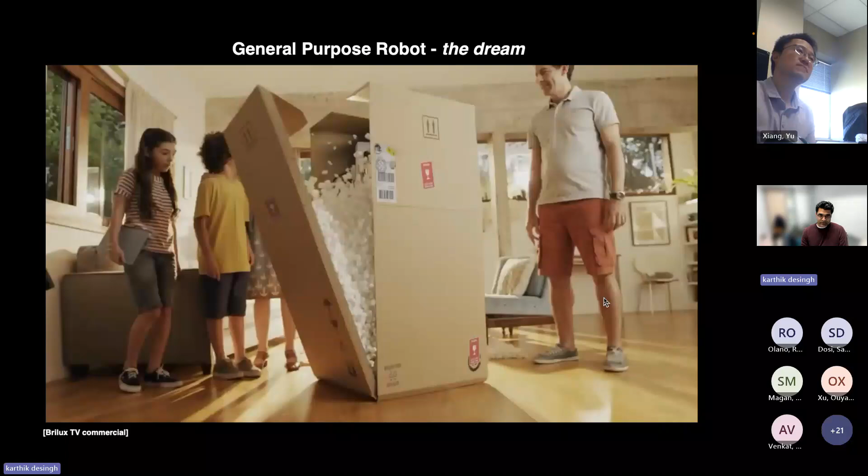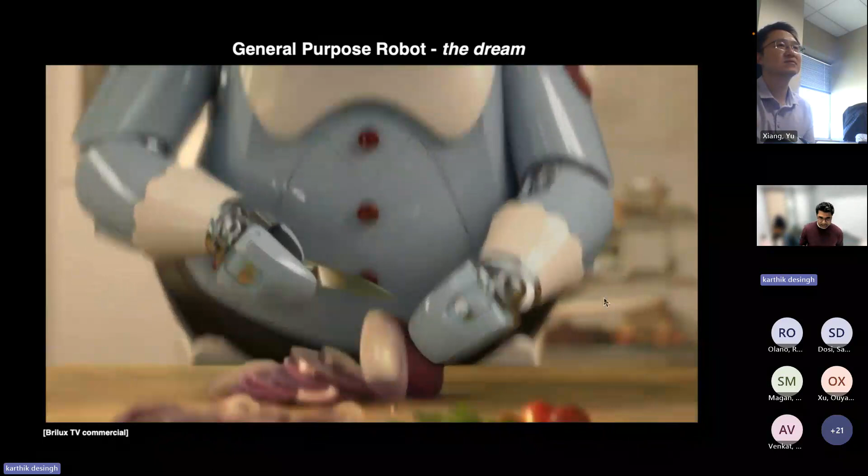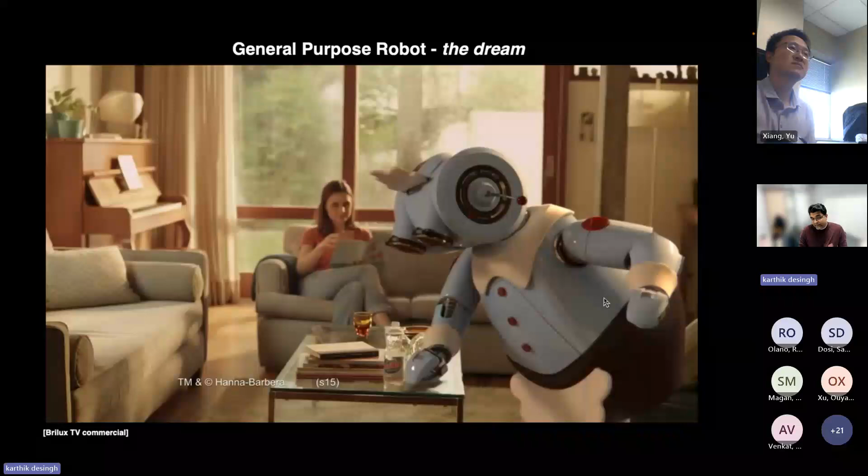So let's look at this video. This is the dream in the future, right? We want to have a general purpose robot. So we will order a robot from Amazon, we just unbox it, and the robot works out of the box. No issues whatsoever, no hand tuning - this is what we dream to have. The robot just cleans the environment, interacts with the objects seamlessly. Sometimes it's not even looking at the object. We would like to have such robots in the future, and I think that's what people have in mind when we say robots.

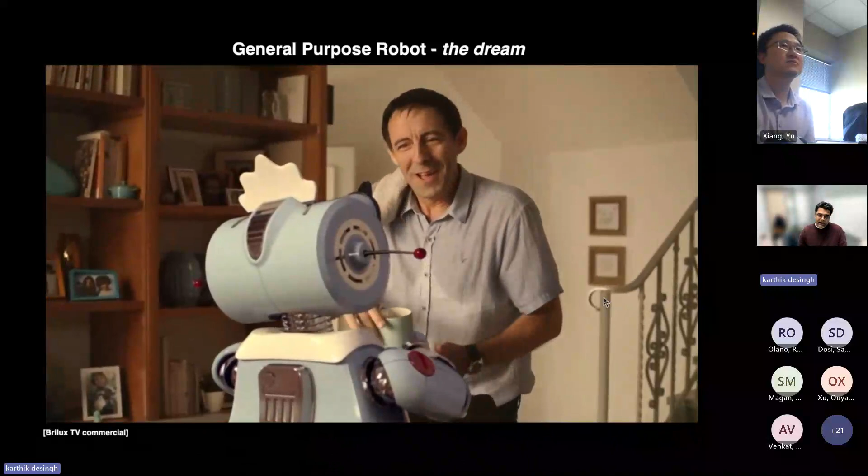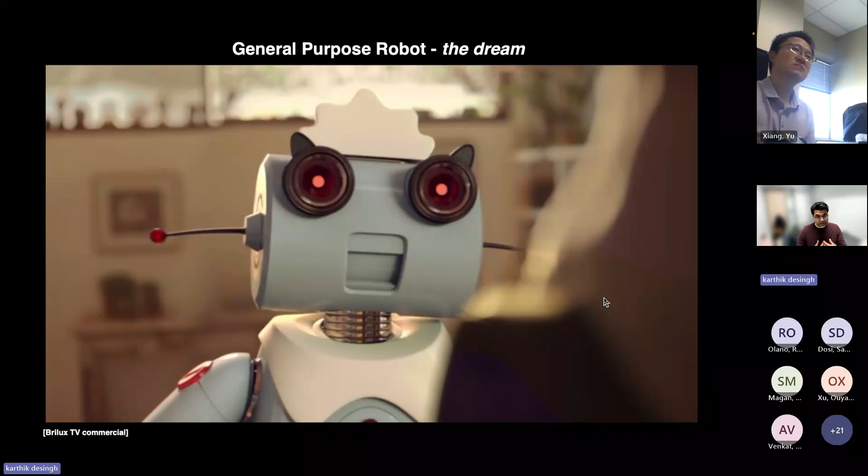The important task is we want the robots to be useful to humans, which means the robots have to perform tasks with the objects in our human environment. So let's ask the question again: why is object-object interaction such an important task to focus on in robotics? From the video that we saw, several tasks shown in the animated video basically has the robot interacting with objects almost all the time. When I say object-object interaction, I'm talking about a robot holding an object and then interacting with another object in the environment - this could be contact-free or contact-rich. So when I say robot-object interaction, object-object interaction becomes an extension to that. I think we have no doubt that object-object interaction is very important to look into, so we can have robots that can help humans.

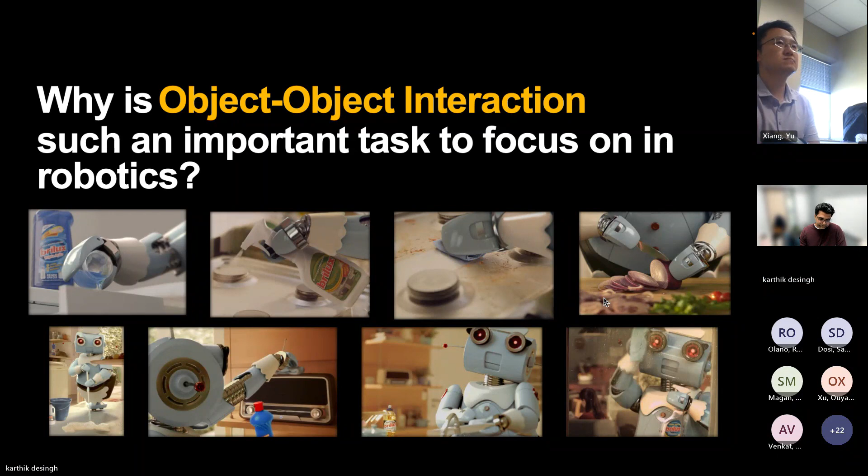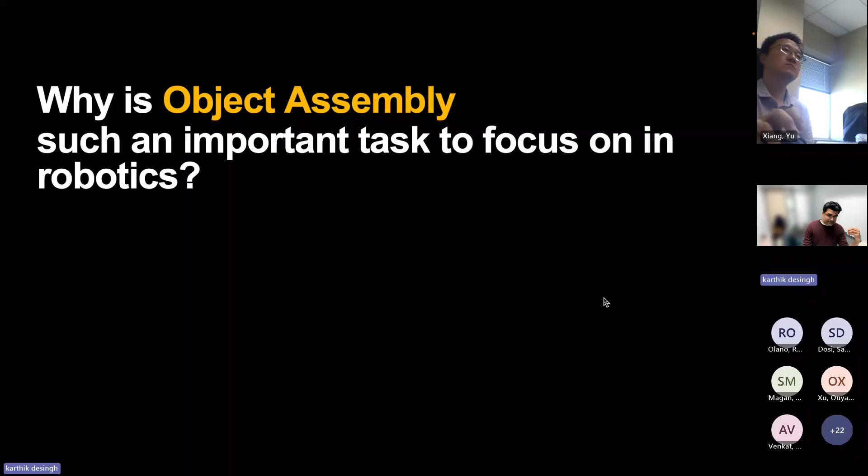Now let's come back to the question: why is object assembly such an important task to focus on? The reason being, object assembly, although it is a subset of object-object interaction, it actually has a very good insight from cognitive neuroscience and developmental psychology, saying that humans tend to understand the physical world much more when they start actually interacting with objects in their environment.

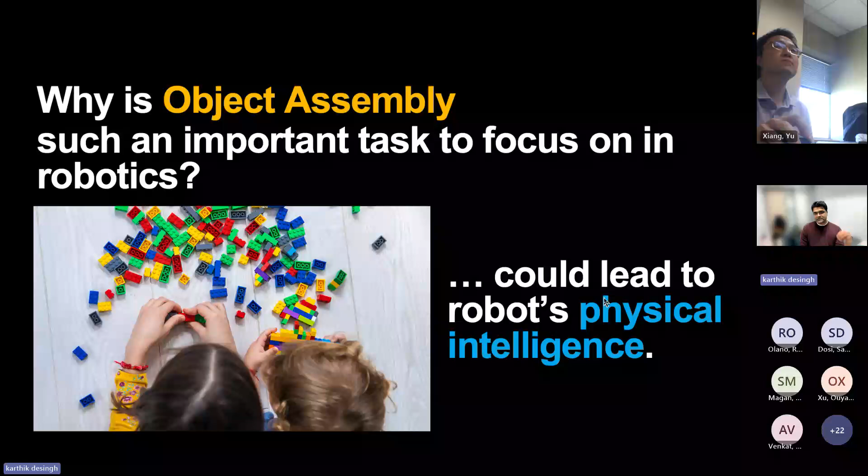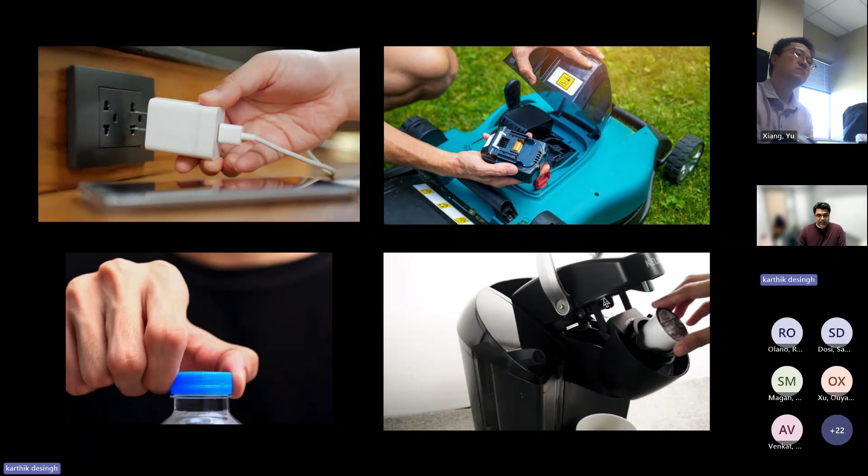So an answer to this question could be that this is probably a pathway that would lead to robots' physical intelligence. The reason for this is we are not stuck to the set of objects that we played with during our childhood - we can actually perform a lot of complicated object-object interaction tasks. For instance, charging your phone, putting a battery into your lawnmower, opening and closing your water bottle, or even inserting K-cups into your coffee machine. So we are talking about physical intelligence, which is a form where the agent - this could be a human or a robot - is able to interact with novel objects seamlessly. I want to emphasize the word novel objects here, because we don't want to stick to the objects that the robot had access to.

We want it to be moving towards any object in the environment so it can understand the physics and geometry behind it and interact with the objects.

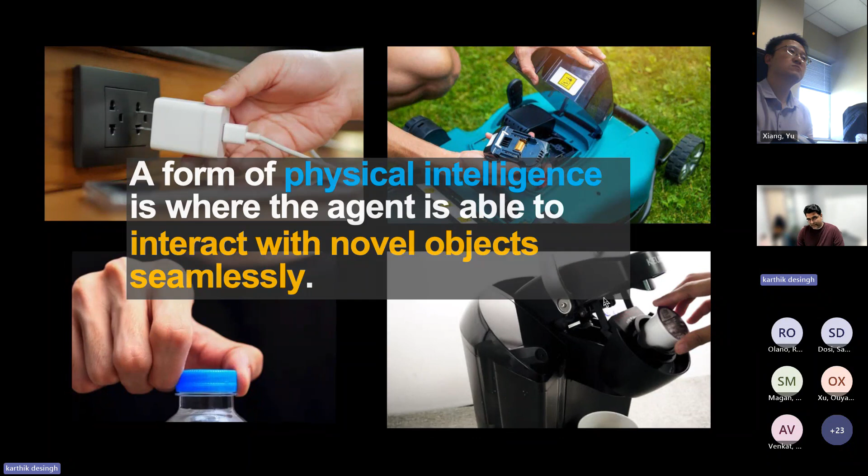So far, I think I have tried to convince you that playing with a lot of objects in the context of object assembly can help build physical intelligence that could lead to robots being able to use any novel objects in the environment and perform tasks. These tasks need not be object assembly, they could be just object-object interaction tasks. So again, we posit that object assembly tasks can lead to this physical intelligence that we want for our robots.

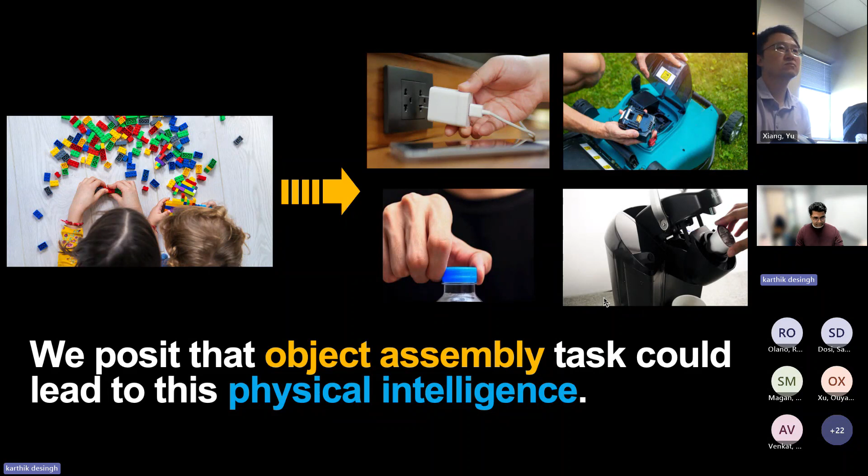But we don't have robots that can actually do really good object assembly yet. So how do we enable robots to perform object assembly tasks? Object assembly is not new, robots have been doing that for a while. For instance, in industrial manufacturing, where the environment is kind of structured, robots have been able to do object assembly as long as they have been programmed to do it.

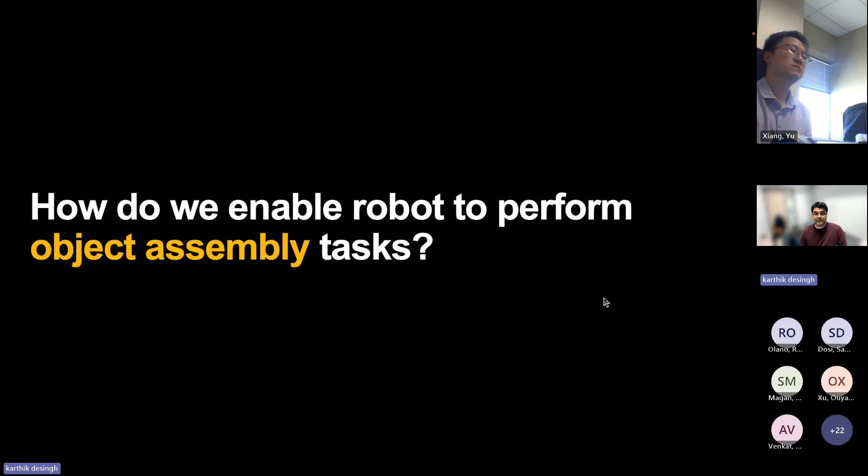Here is an example. This is from almost a decade ago, maybe 8 years ago, where the robots are basically assembling an IKEA chair.

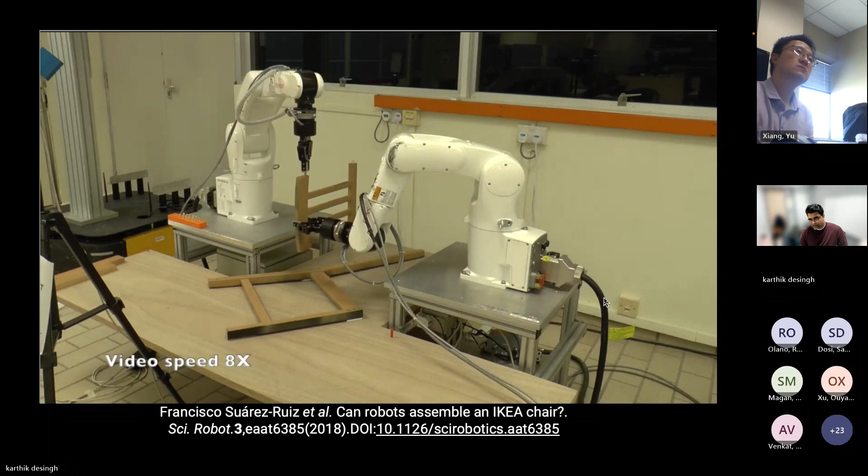I want you to pay attention to the task a little bit more and understand, is this novel object assembly? What are they not telling you in this video? And also look at the insertion task, especially when there is a spiral motion.

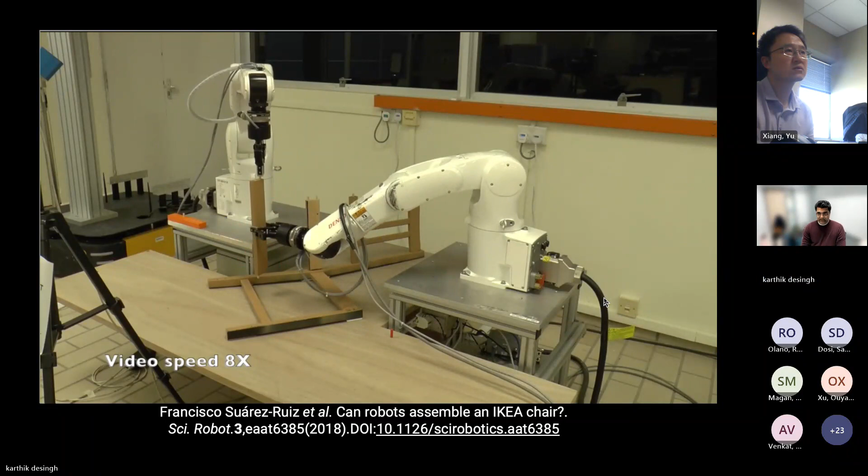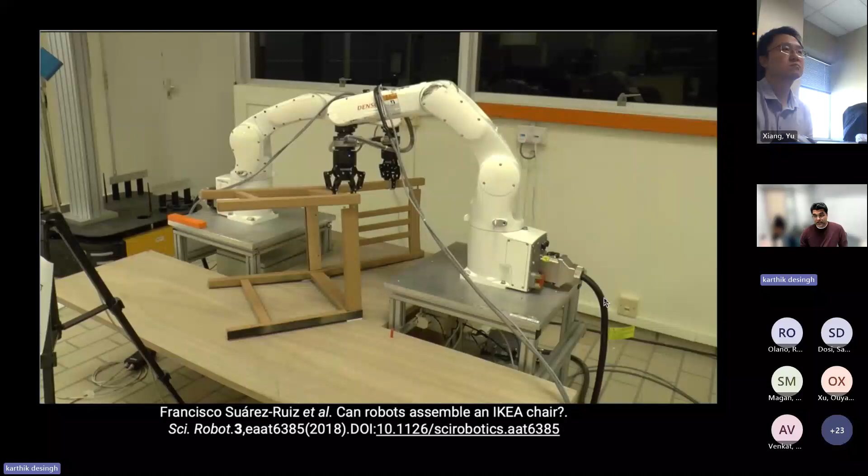So if the students are paying attention to this video, you should note that the bottom half or the bottom section of the chair has been stuck to the table. The objects are not moving, which means this could be a very well pre-programmed or well-initiated or well-structured problem in a way. But there is a camera on the right side or on the left side. So maybe it is doing a pose estimation on a known geometry of objects, right? A set of objects or object parts whose 3D models are already known.

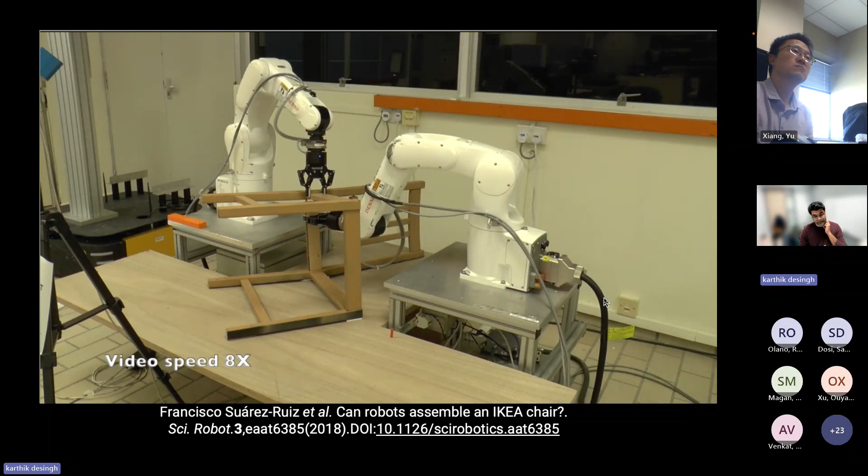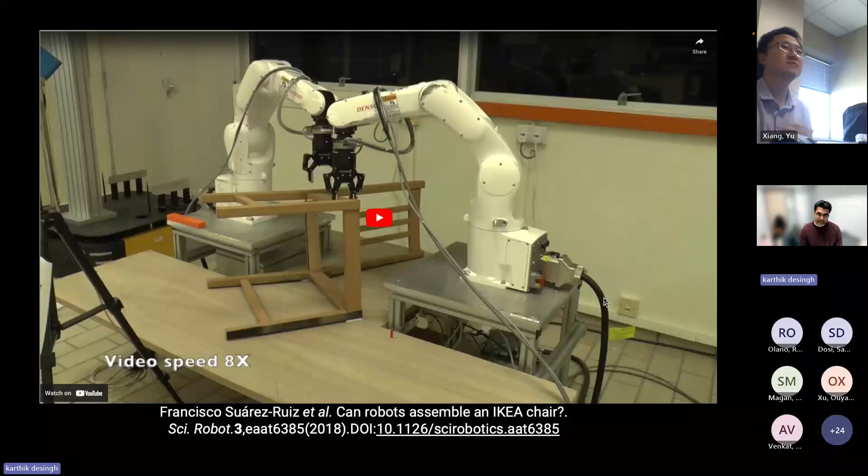The behaviors of the robot is probably already programmed, so maybe there is a collection of behaviors. And then it's all about estimating the pose of the objects followed by executing the sequence of actions. So they claim that this can be done in 20 minutes. And this was a big feat when it came out in 2018. I totally remember when my entire lab went gaga when they saw this video of robot assembling the IKEA chair. But what we are talking here is about performing object assembly on novel objects.

Okay, how do we humans do this? There is evidence from neuroscience and cognitive science that supports that humans employ spatio-geometrical features mediated by some neural pathways and cognitive processes to perform the assembly task. I'm not a neuroscientist and I'm not a cognitive science expert here, but these insights are very useful to understand that spatial geometric features are being used for doing object assembly tasks.

You might have heard of mental rotation, so these are some of the concepts that stem from those ideas. But what I wanted to take away from here is that humans employ spatio-geometric features to perform assembly tasks. So with that, we can posit that the robots need such representations, spatial-geometric features, to learn novel object assembly skills from some demonstrations.

So let's say we try to come up with a task inspired by Lego puzzles. We designed some object pairs with various peg and hole geometries. Peg and hole geometries are commonly considered to be the canonical task for object assembly, so let's stick to that. And these are some shapes that we 3D printed. As you can see, there's an arrow, there's a key, there's a U, and there is a pentagon.

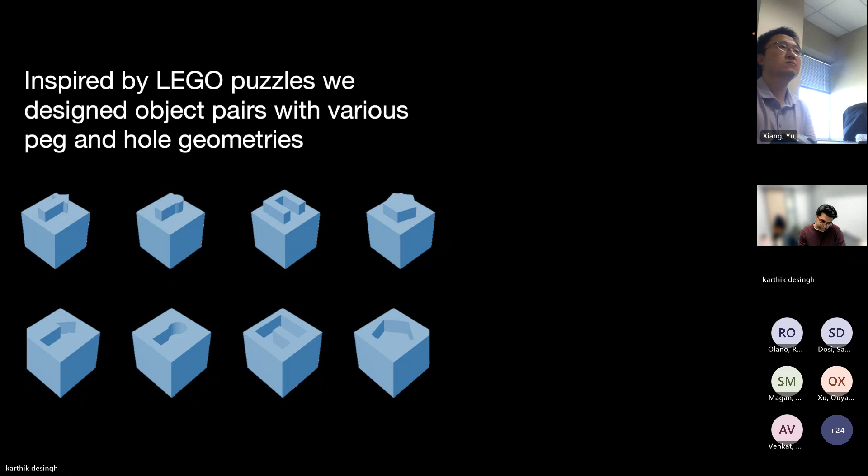Now the assembly process would look like this, where in the space, if you have these object pairs, all you're trying to do is form some sort of mental rotation so that you can assemble them into one piece. So this is the problem scope that we're going to talk about. There are a bunch of object pairs with peg and hole geometries, and we want robots to perform the assembly task. We want to see if the robot can do this for novel objects, just using these spatial geometric features that could stem from, let's say, a camera image or camera observations.

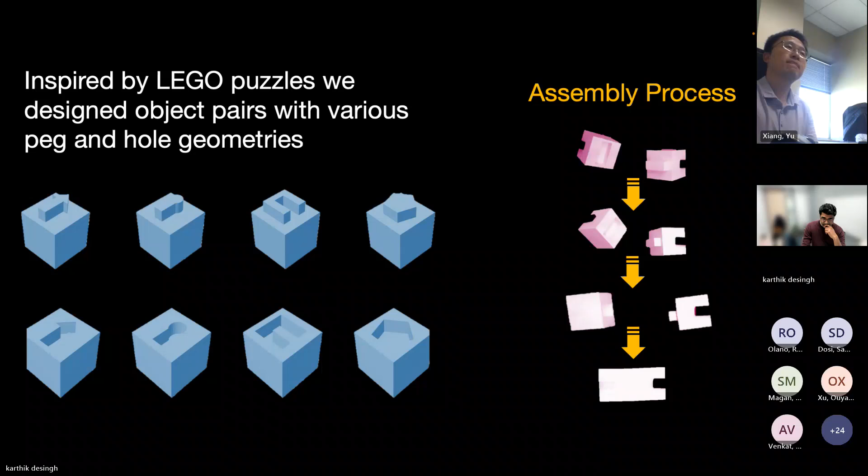So let's talk about the task a little bit more. Here is the robot performing this task. It's a dual arm robot, and it has these objects in its gripper.

The task starts off like this, so there is no grasping involved. We assume the robot already grasped these objects. In this particular image, we have two blocks with extrusion and intrusion geometries that look like a peg and a hole. The observations, especially for this real world robot experiment, come from this top view camera, so this is the sensor observation that the robot sees.

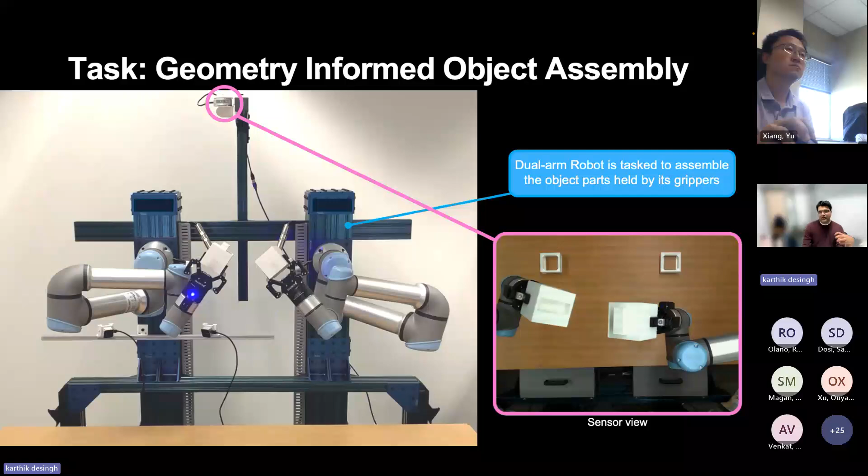So the task starts off like this. The robot has these two geometries, shows them to the camera, and then figures out how to rotate or move its grippers to perform this assembly task. This is an example of how the task would look if the robot performs it.

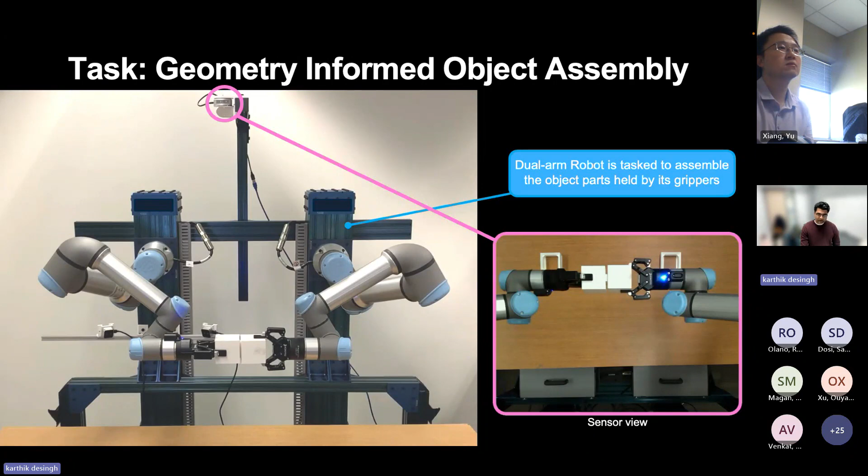Okay, so let's set some objectives for this project. First, because there is a dual arm robot, we want to learn a dual arm manipulation policy that could perform this object assembly. We have two setups, one in simulation using PyBullet, and the other in the real world, which you just saw. We would like to come up with a policy that works in both these environments.

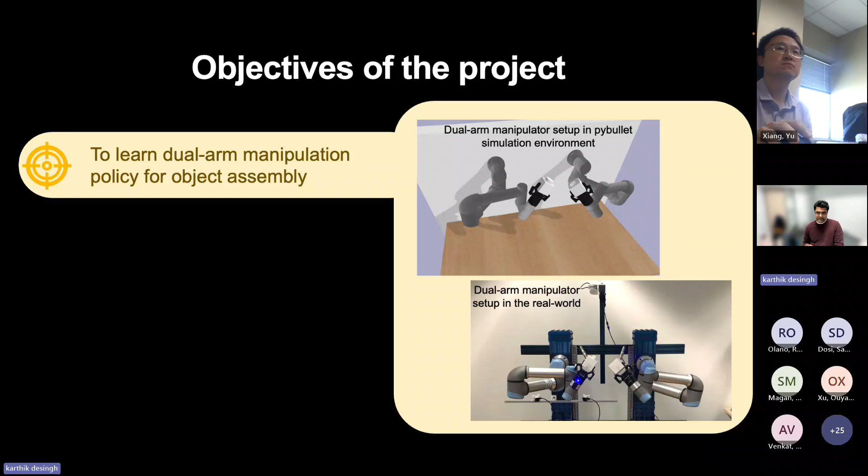The second thing we're interested in is the spatial geometric reasoning task. We're trying to figure out if just by using visual information, the model can perform this spatial geometric reasoning and do the object assembly.

So far, the object pairs we use have different complexities, and we don't want to give this information explicitly to the robot. It has to figure that out just from looking at the visual observations.

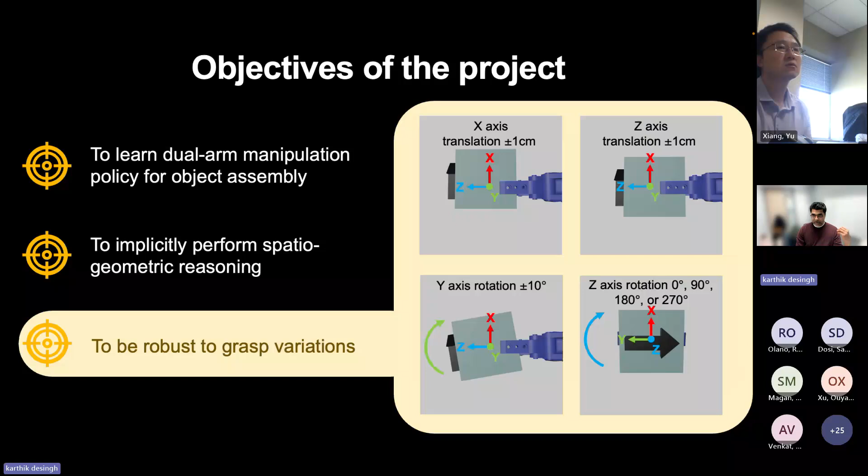The third objective is that we want our manipulation policy to be robust to grasp variations. We have these variations because although we assume grasping is already done, we know grasp variations could actually be a huge problem in object assembly, so we want to understand how much impact it has. We have 4 different variations: X translation, Z translation, Y rotation, and then 4 different rotations on the Z axis.

So, 3 objectives: learning a dual arm manipulation policy, performing spatial geometric reasoning on a bunch of shapes, and also being robust to grasp variations. This is what we want to do.

Karthik, one clarification question. So in this case, the pair is already given to the robot, right? The robot doesn't need to select the correct pairs to do the assembly. Exactly, the pair is already given. Okay, so then it just needs to figure out how to put them together. Yep, yep. Okay, thanks.

Okay, so again, we hypothesize that robots need geometric spatial features to learn to perform novel object assembly. That's the premise we are going with.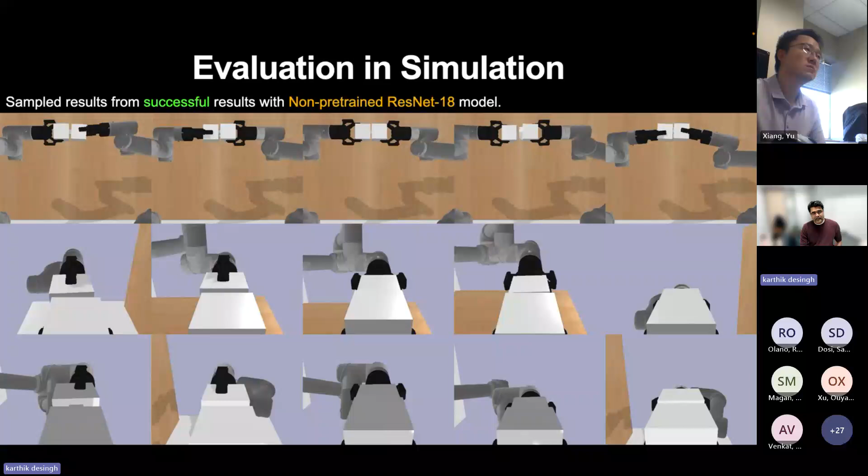So maybe there is a domain distribution shift that we could not think of before. But there are also some interesting insights that we gathered in terms of the rotations that were induced by the grasp variations. I'll talk about that in a bit. I want to show quickly the visual results from our non-pre-trained ResNet 18 model.

Let me play this again. So here are some examples where you're able to successfully perform the insertion. Again, the robot does not know which geometry it's looking at - all it is getting is this visual information, and it has to figure it out from there.

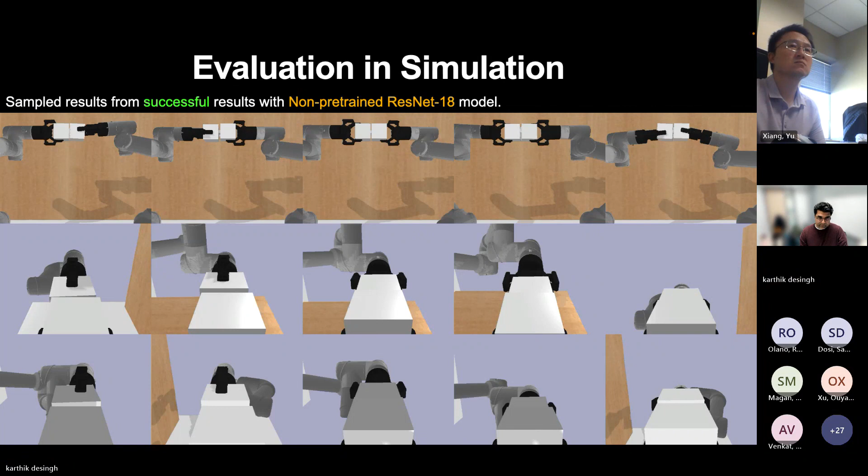Okay, let's dive into the results a little bit to understand what happened and where the pre-trained models do not work really well. I want to highlight the different task variations or grasp variations that we have: one is the x-axis translation, we call it XT; Z-axis translation, we call it ZT; Y-axis rotation, we call it YR; and Z-axis rotation, we call it ZR. With that in mind, let's look at the results.

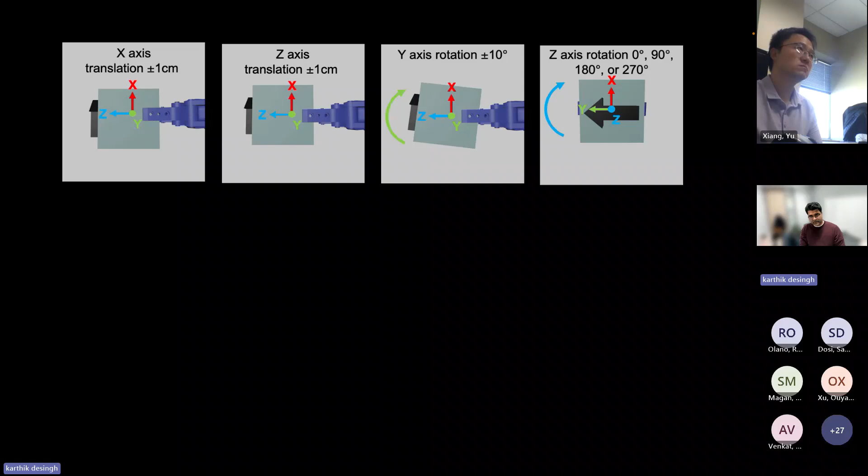With simple translation and rotation, we can see that pretty much all the models actually perform really well for the translation. They have some gap in the Y rotation, but they actually struggle quite a bit with the Z rotation that we see here.

And this was actually trained with 100 demonstrations. We can see that these are really good, whereas the Z rotation is causing the error. So again, we are highlighting the fact that the non-pre-trained ResNets actually perform really well in these tasks.

Now, how about some combination of these grasp variations? So here we look at combinations of grasp variations. For instance, you have XTZR, which means it's a combination of this and this. ZTZR, so you have this one and this one as a combination, and so forth. The last one is the combination of everything.

We can see that when you have a combination of translation and rotation, which is often what you will see if you let the robot grasp any object, even the non-pre-trained ResNet model performs really bad with this combination. Also, we went to 1,000 demonstrations instead of 100. We had to move to 1,000 demonstrations to achieve this accuracy on the combinatorial grasp variations.

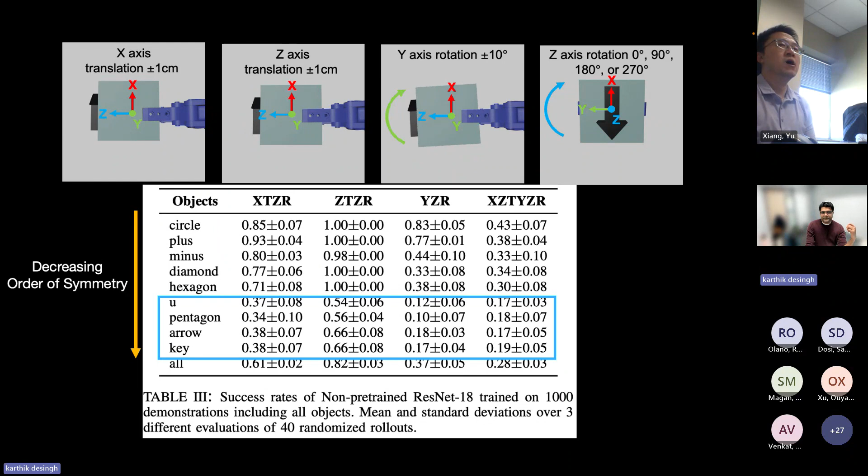We also wanted to see what sort of geometric reasoning is harder when we have this combination of task variations. When we started going towards the peg and the hole that had a unique solution, meaning no symmetry, we saw there was a huge drop in performance. So what I'm trying to say is maybe these models are not performing the spatial geometric reasoning that we want. But this gives us a nice idea to think about what variations we should actually focus on to understand and do object assembly really well.

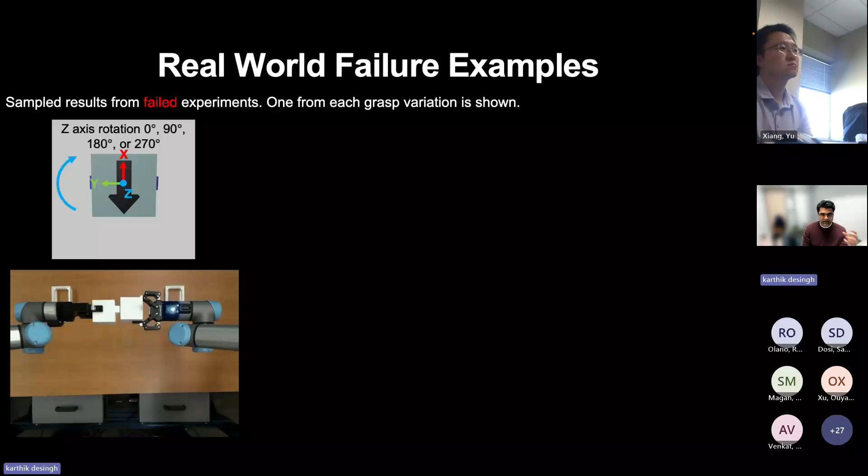So here are some more examples talking about the same thing. With the Z rotation, you can see the robot was not able to figure out the orientation, so it failed there. A couple of failure cases on the x-axis translation and the y-axis rotation in this case. But in almost all these cases, except for the first one, we can see that the failure is almost nearly in the location where we want these objects to be.

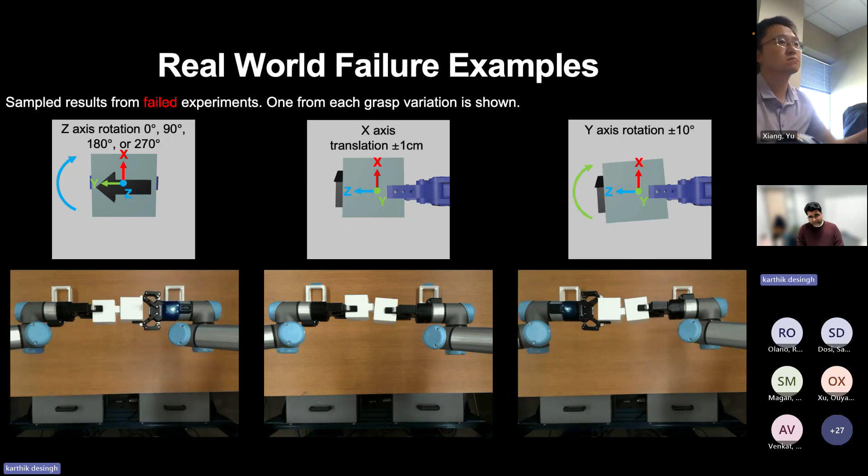Okay, so there might be several questions in people's minds so far. What if we fine tune the pre-trained models? What if we give more data? How much impact does proprioception have? Does object texture help in performance, because we don't actually have textured models? How does the model perform when the geometries are perturbed from the training distribution? Meaning, if they are not necessarily in the center, let's say the U shape was rotated a little bit, how do these rotations of the peg shape impact the performance? So we did experiments on a number of things, and if people are interested, please look into our work much more, so you can understand how these things impact the performance.

Okay, so I want to go back to the question that we asked earlier. Humans have these spatial geometric features that they use for object assembly, and we posited that robots need such representations to learn novel object assembly skills. Where do we stand at this point? We can do policy learning with no explicit object geometric knowledge. We thought visual information is good enough, and we thought the pre-training visual representations are good enough to give these features. What we found out was that this is not necessarily true because of the distribution shift.

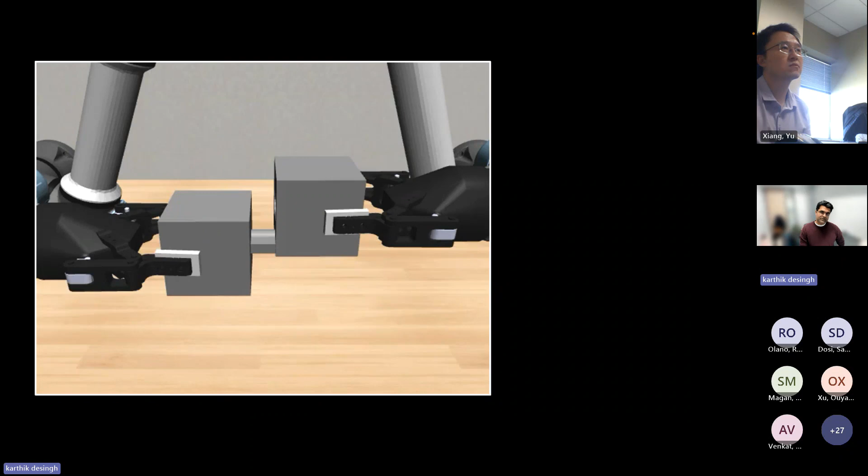This is the most recent work that we archived. It's called AugInsert: Learning Robust Visual Force Policies via Data Augmentation. Let me set up the problem in this particular scenario. Again, it's a peg in the hole, dual arm manipulation. There's a peg and the hole object, but now we're going to use force and torque sensing. We are not going to use the top-down view because we thought that was redundant. So we're going to just use the force and torque view, the left wrist view, and the right wrist view. The thing to note here is that the task starts exactly like this, which means we are not bringing the object all the way to make the contact. The task here starts with the contact, so it's only contact-rich manipulation.

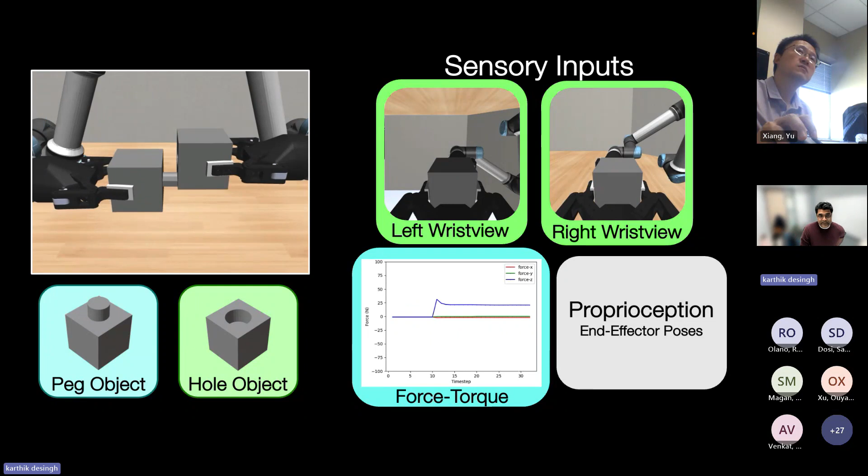Okay, so now what are we interested in this work? In this work, if there is no variation during the demonstration collection, we want the system to be performing really well on observation-level task variations. Let me show you what we mean by observation-level task variations. One task variation could be that we will change the peg and hole shape, the peg and hole body shape. In combination, we can have about 54 total object shapes for this particular experiment.

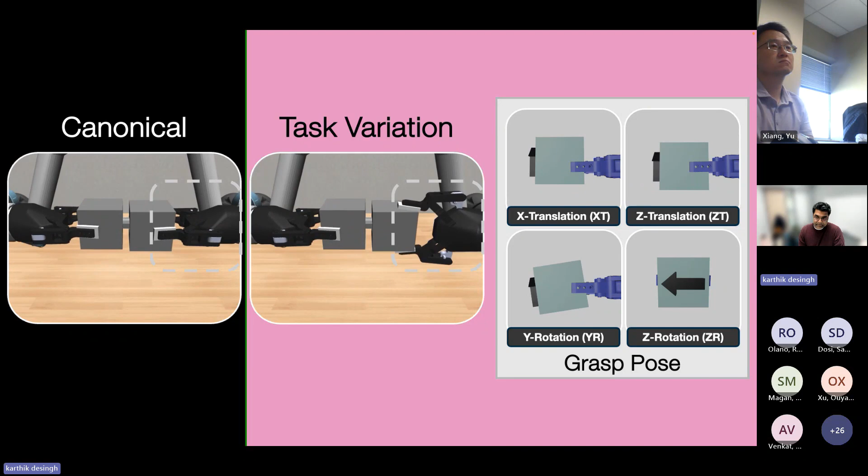So when I say peg in the hole, I'm talking about the exact peg in the hole shapes, and the body is basically the body that the robot, the objects have. The other task variation is again the grasp variations that we saw in the first work. So we want to still be able to do this under these grasp variations, especially the rotations we are talking about, like minus 10 to 10 degrees, and the translation we are talking about 2 centimeters. For Z rotation, we are talking about 90-degree offsets. We also want to be able to perform if the scene appearance or the lighting condition changes.

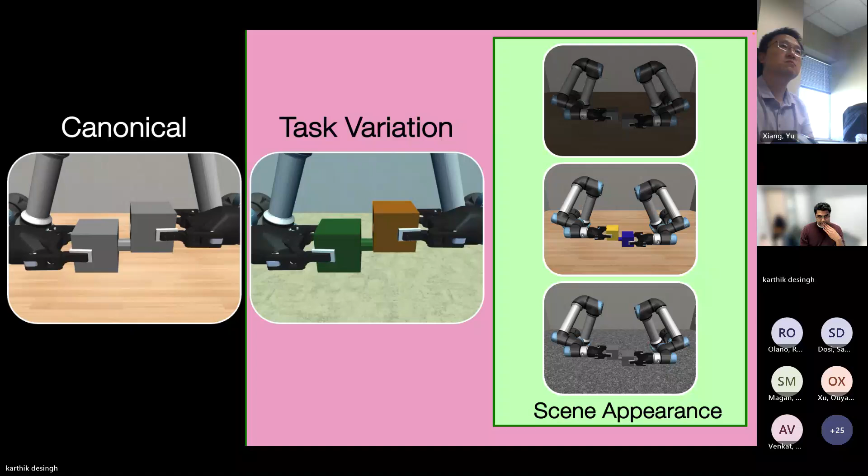The other task variation we want the system to perform well is camera perturbations. For instance, if we kick the camera a little bit, we'll have a small perturbation we want to be able to handle. We also want to handle noisiness in the sensor, especially in force and torque sensing.

So these are all the task variations we want the system to perform, but the human provided demonstrations are only the canonical demonstrations.

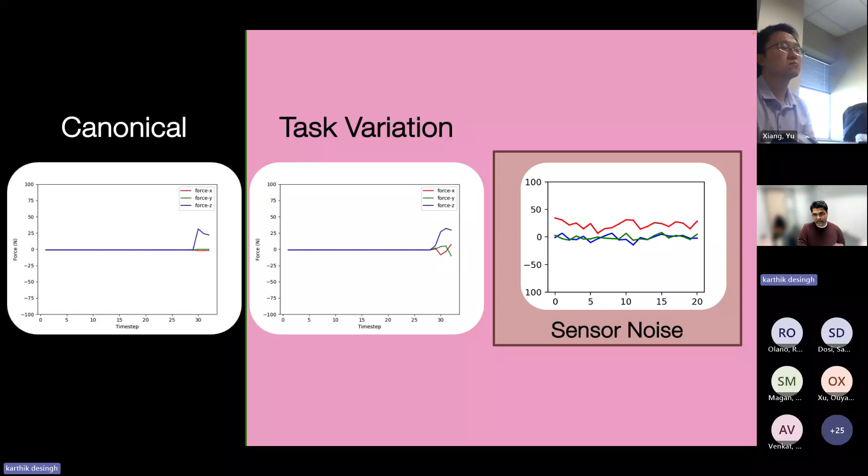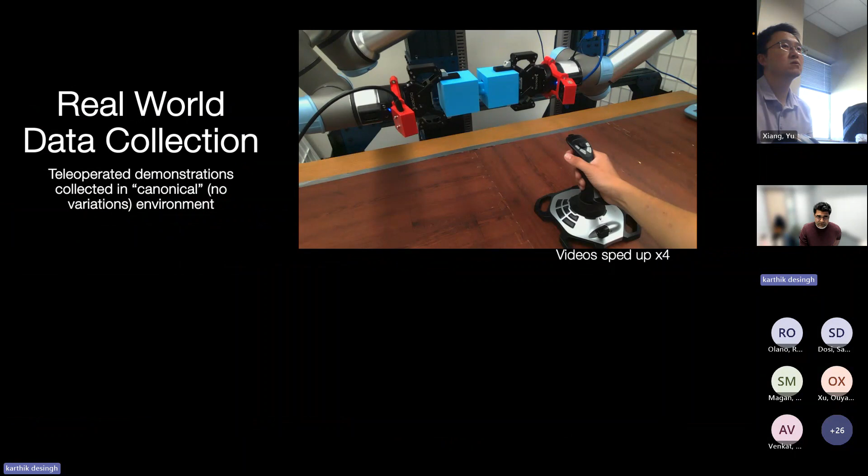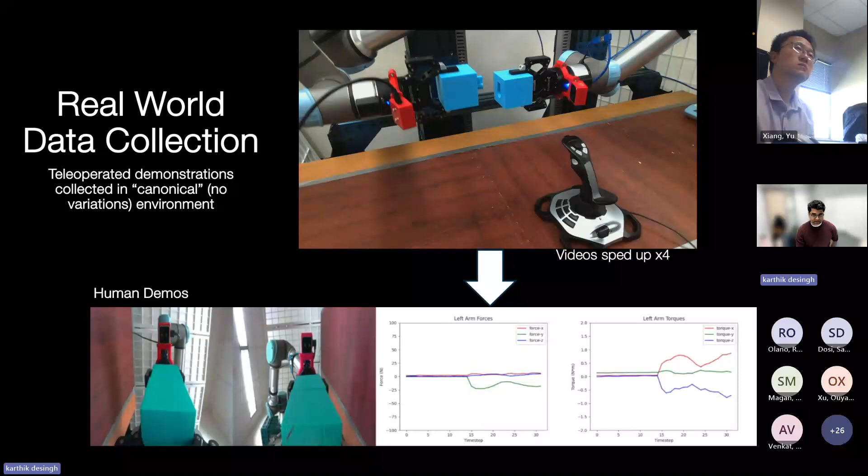We did some real world experiments as well. Here is real world data collection, where again we are doing delta X, delta Y, delta Z. We used a joystick to do this data collection, along with observations from the wrist cameras and force and torque sensing from both wrists.

In the real world evaluation, we get a really good success rate on the canonical environments, meaning tested and trained on similar scenarios, about 90% success rate in that scenario.

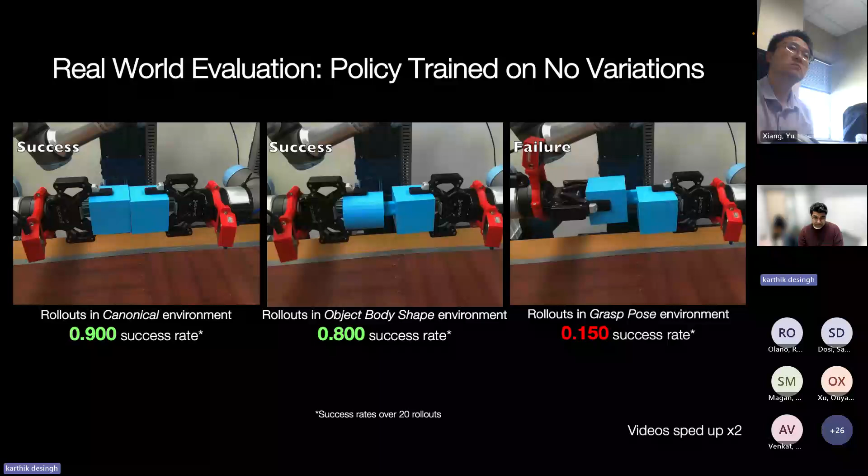But when we add body shape variations on the canonical model we trained, we see a drop in performance, down to about 80%. Grasp variations is a harder problem, where success drops to almost 15%. The key insight from this real world experiment is that data augmentation may be necessary to improve robustness. Just like in simulation, adding more grasp variations and object shapes could improve performance. That's the observation from this work.

Some key takeaways from these two works: task variations are really hard to be robust to in object assembly learning. Visual pre-training models learned on internet data are not necessarily best for object assembly, probably because they lack the spatial geometrical features we hoped for. Force torque data, or some sort of tactile information, is vital, especially during the contact-rich phase of object assembly. We hope to come up with spatial geometric feature learning that also incorporates tactile information.

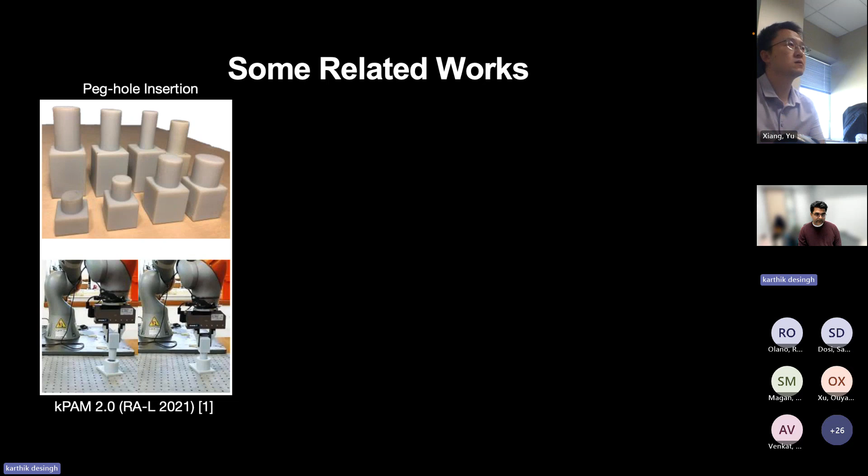I also wanted to point to some related works in this space, since we are not the only ones doing object assembly. There was a paper from MIT in 2021 called kPAM 2.0, and another work, RB2, for shape sorting. There's also the question of figuring out which hole is relevant to the peg you're holding. MimicGen has a few tasks involving multiple part assembly that might be interesting to people.

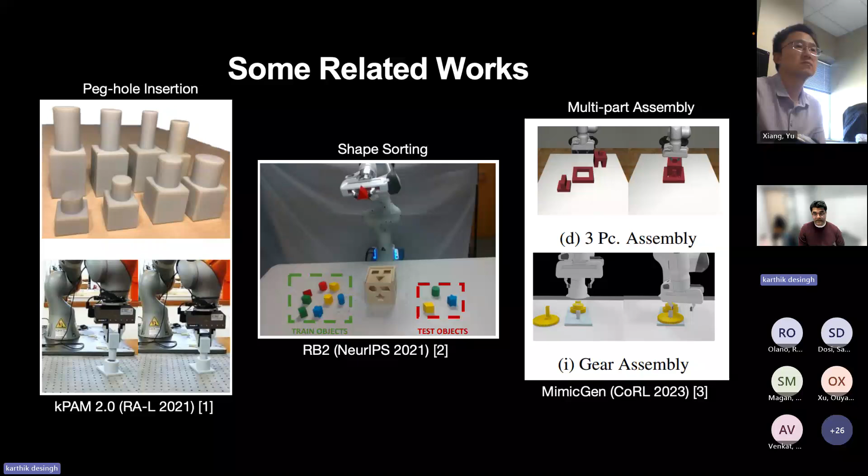There are also works on visuo-tactile approaches. One from 2019 uses vision, touch, and self-supervised learning. Another is a series of work called InsertionNet, which explores how to use just visual sensors to perform this kind of task, for people interested in that direction.

Okay, so that's all I had.

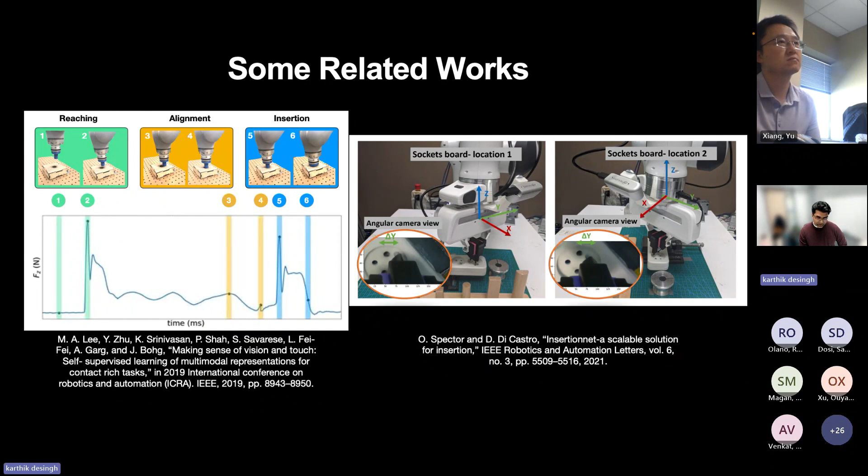We also have other works in the lab. I won't go into detail, just play a couple of videos. One is grasping for manipulation of larger objects, like the Spot robot grasping large objects such as chairs, using a SuperQ-GRASP method with super quadrics, which are primitive shapes. This has no learning in it, it's purely geometrical, and we find it can give better grasps than state-of-the-art methods.

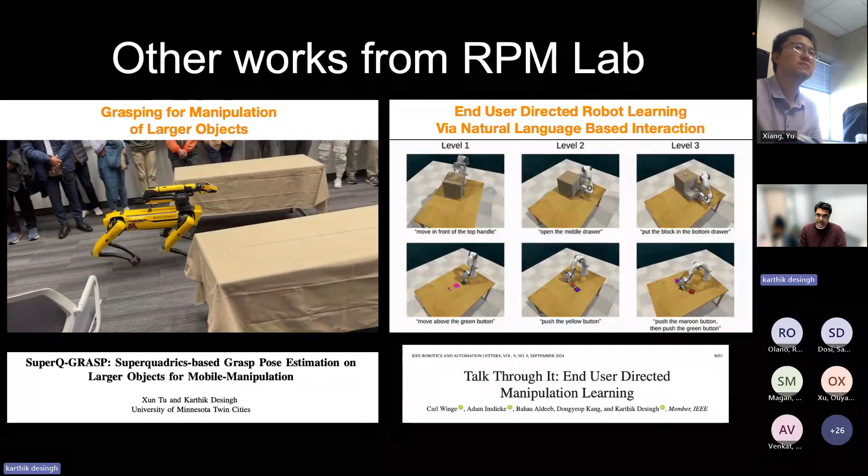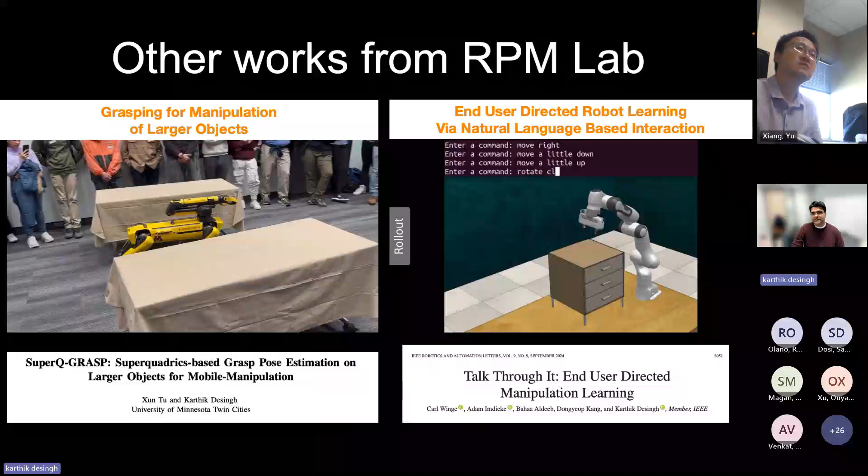The other work uses language for demonstration data collection, focused more on the end user, so that end users can talk to the robot and give demonstrations. We show that you can hierarchically learn from actions to tasks to skills, and there is a benefit to doing that. If you're interested, please look into this work.

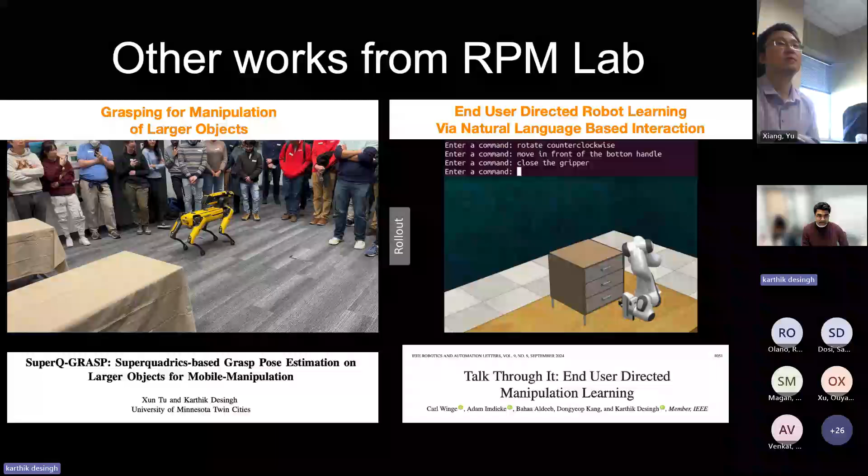With that, I want to thank my lab. These are all the folks who actually do the work. I'm just presenting here, so thanks to all of them. And thanks everyone for paying attention. I'm happy to take questions.

Thanks, Karthik, for the wonderful talk. Robot manipulation assembly is a very challenging task. I think Karthik is trying to use this as a case study to learn what is the visual representation, what is the strategy to solve this problem, like data augmentation or tactile feedback and so on. It's a very great talk. Let's start with some questions from the students.

So, Sarab, you can unmute and ask the question. Sure, yeah, so Professor, great, quite inspiring work and great presentation.

My question was, is there a specific reason why you focused on a dual arm setup? Because in the real world, we have tasks like inserting a charger in a socket, which can be done with a single arm, right? So is there a specific reason why you used a dual arm setup?

Great question. For this particular set of works, we just happened to have a dual arm setup, and then we started using that. But the bigger reason for using dual arm manipulation comes more from the fact that all the objects in our environment are designed for humans. We design these objects with an implicit understanding that humans will use them, meaning you can either hold them with one hand or with two hands. So the dual arm manipulation was trying to say that future human assistants should have two arms, because if you want robots to work with objects in our environment that are specifically designed for dual arm agents, which are humans, maybe we should just start using dual arms.